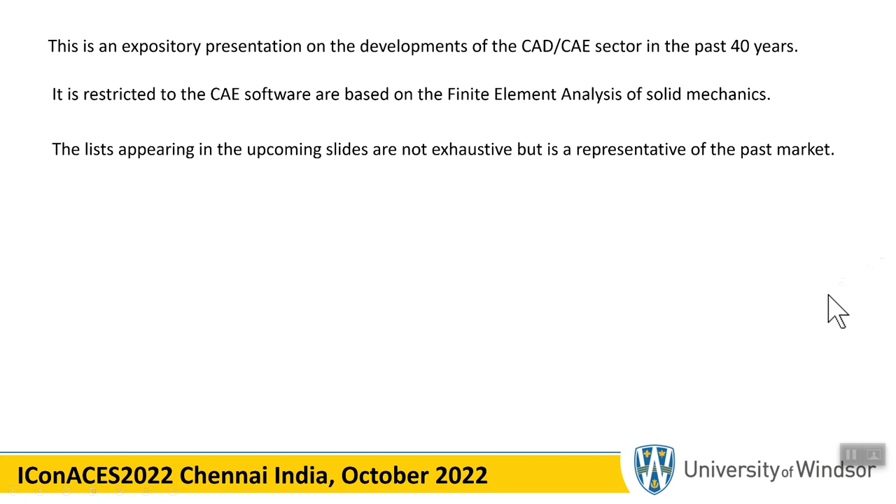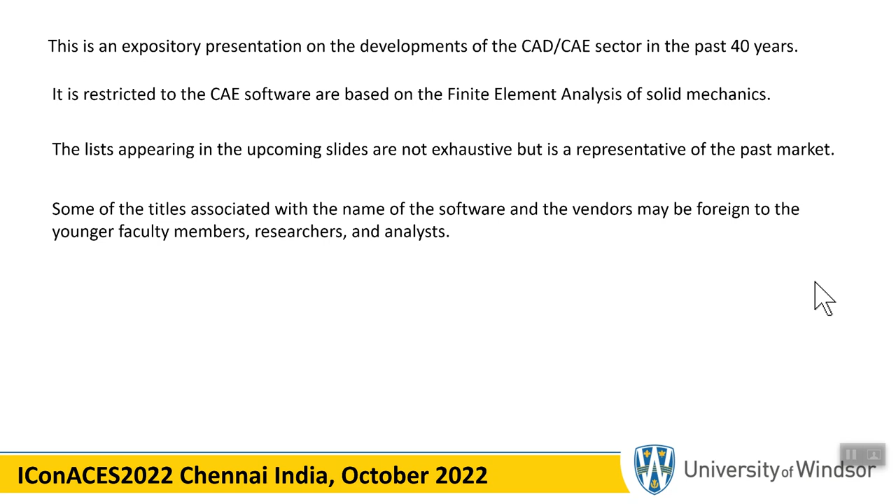The software that I'm going to be briefly bringing up on the screen later on are just a representative. There's a lot more that I may not have covered, but these are the primary software in the past 40 years. Certain names that I'm going to mention may be unfamiliar to some of the audience, partly because I consider myself an old timer, and some of these things go back to about 50 years ago.

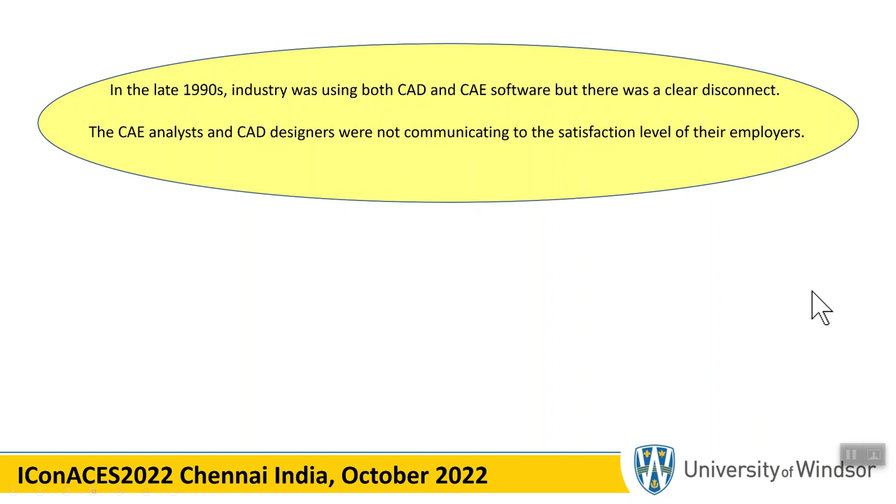Now, in the 1990s, the industries realized that there is a mismatch, a disconnect between the CAD software and the finite element software, or CAE software. So the CAE analysts could not clearly communicate their findings to the CAD designers and the other way around. This is why there was a move by the industry to push these vendors in a certain direction.

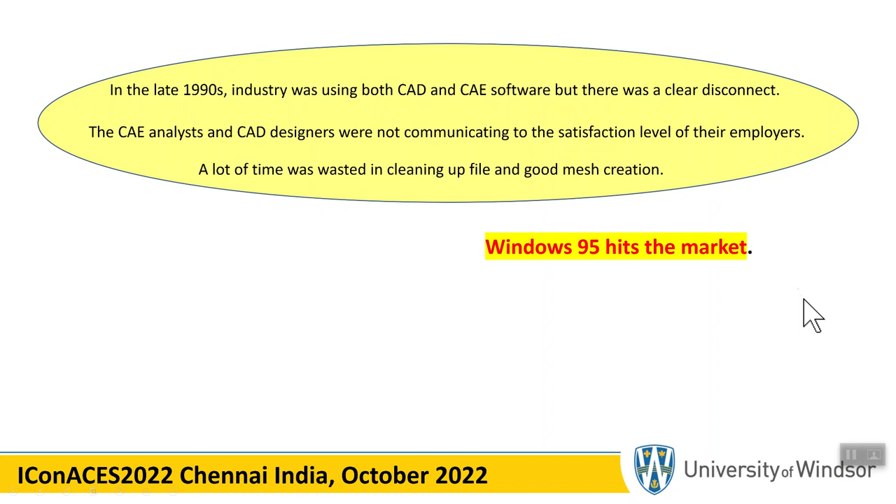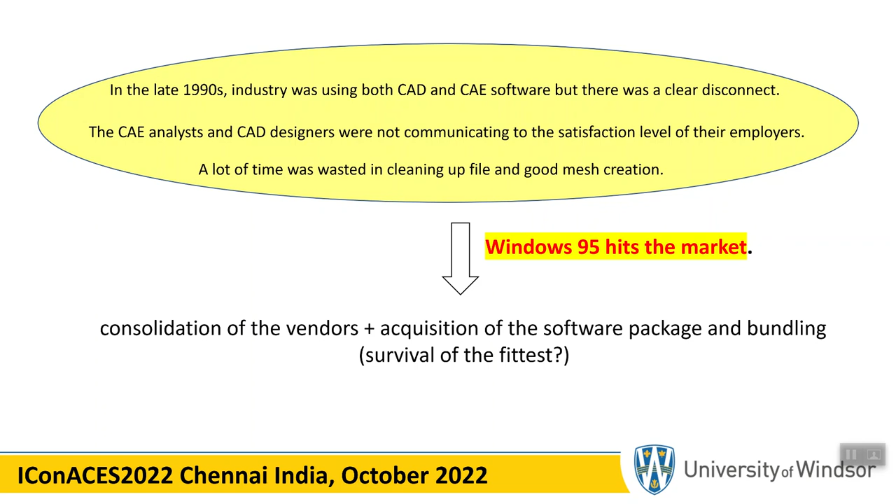Now, in 1995, you may recall that Windows 95 hit the market, and that dramatically changed the landscape. This is when the vendors started making a lot of acquisitions of software packages and bundling them with other things. Some of the software basically disappeared.

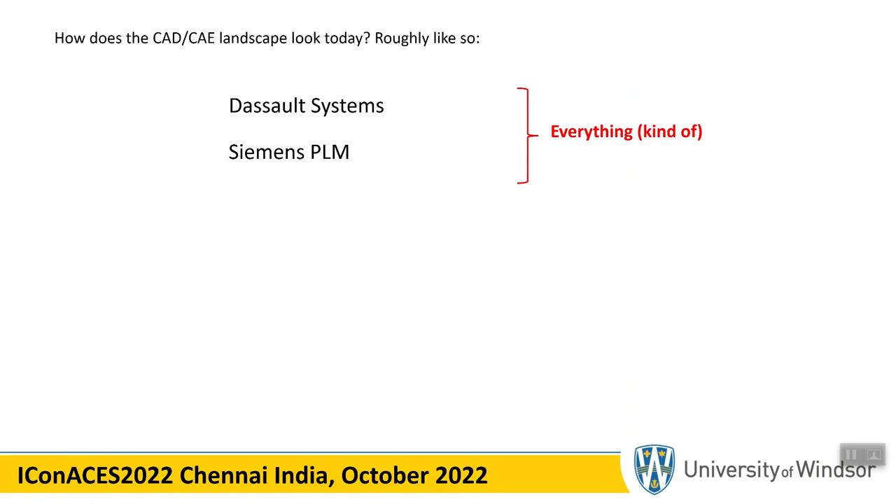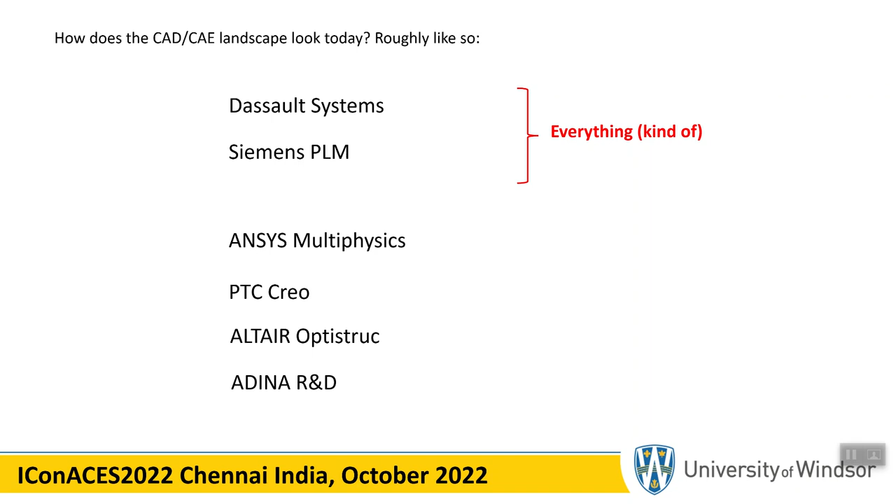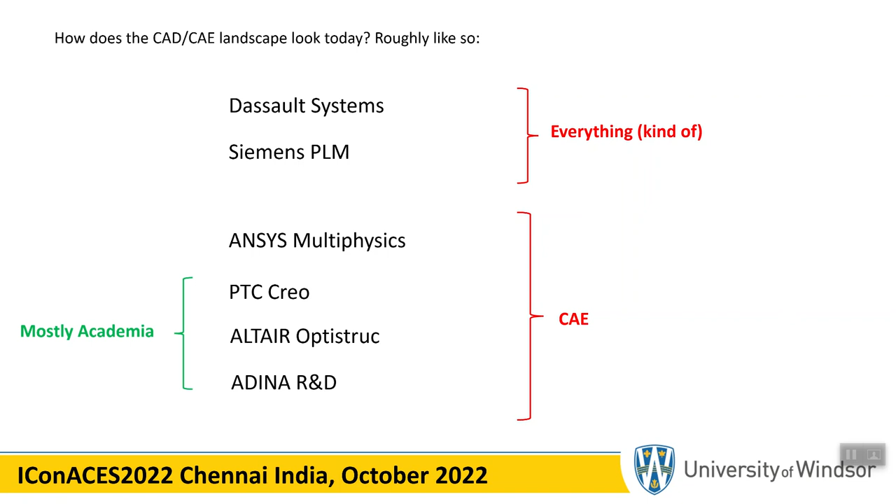Now, how does that crowded landscape look today? Well, there is mainly Dassault Systèmes and Siemens PLM, and these are trying to put everything that industry possibly wants and bundle it as a business platform. Then there are others such as ANSYS Multiphysics, PTC Creo, Altair, and ADINA, and these are mostly CAE packages, FEA packages, or fluids packages. I do not consider them as CAD platforms. These three are mostly used by academia, whereas the other ones are widely used in industry.

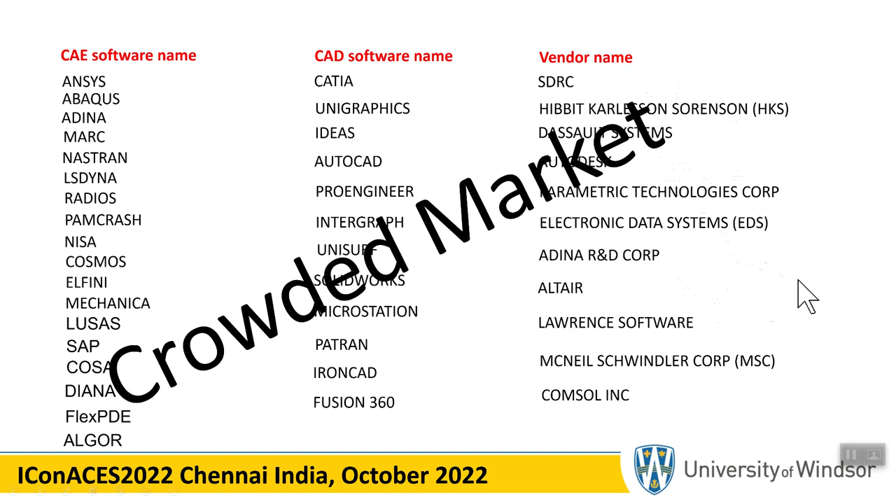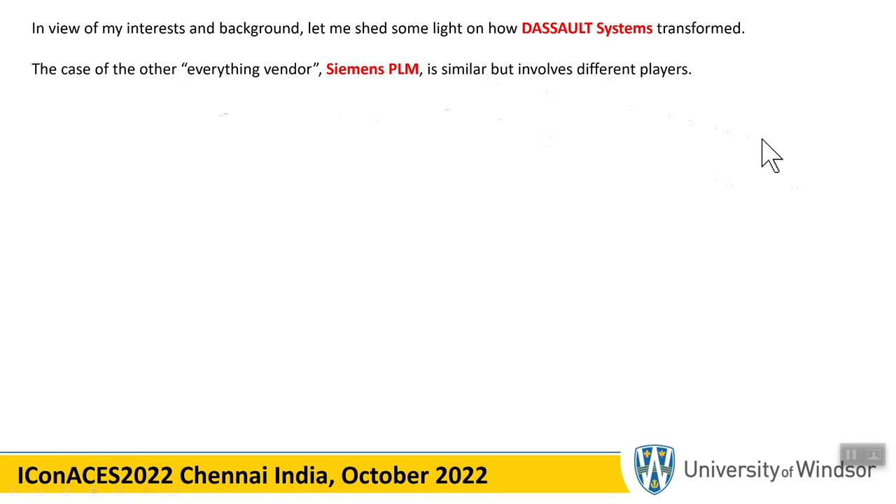Remember, this is what we had before, that crowded picture, which has been reduced to only two main players and three other CAE vendors. I'm going to be concentrating on Dassault Systèmes, mainly because of my interest in CATIA and 3DEXPERIENCE, which Dassault Systèmes owns. There is also Siemens PLM, and the story is similar, but I will not discuss it any further.

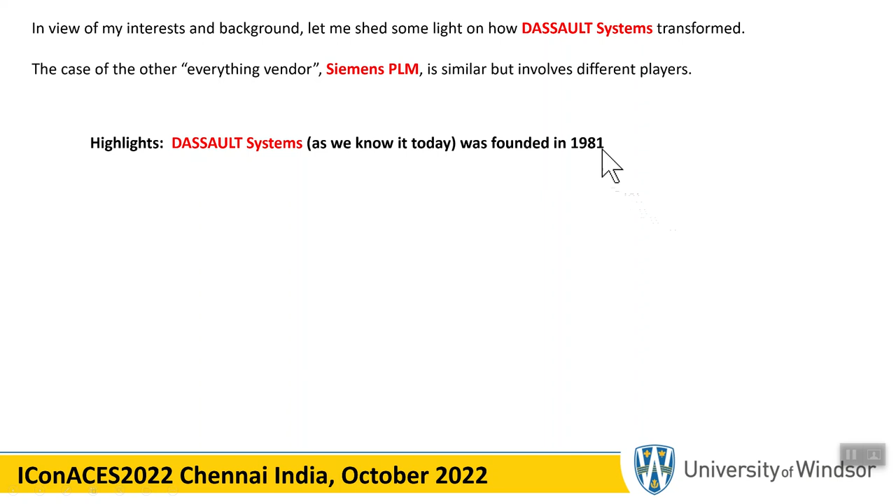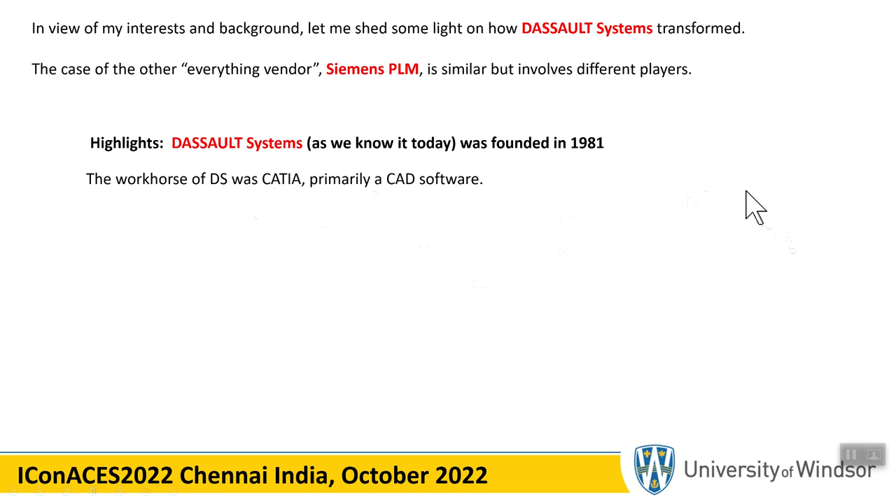Now, here's the highlight of the story behind Dassault Systèmes. It began in 1981, although prior to that it existed in the form of Marcel Dassault Aviation, which Dassault Systèmes later branched off. So it goes back to the 1970s as an aviation company. It was the main developer of CATIA, and the reason CATIA was widely used by the aerospace industry is because of its roots in Marcel Dassault Aviation.

Now, inside that CATIA program, somewhere around the 1990s, they put a stripped down version of a French code, which was called Elfini. Elfini stands for Élément Fini, meaning finite elements. At that time, IBM was teaming up with them on the software sales, marketing, etc.

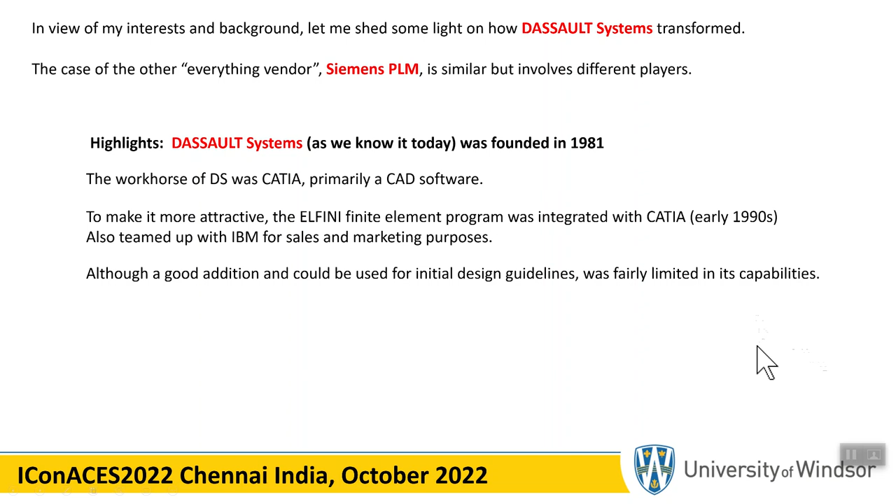CATIA was and is the state of the art industry standard for CAD activities, but the code Elfini buried in there is very limited in its capabilities. They included it because it was felt that the CAD analyst, the beginning or initial design engineer, should have some access to a basic FEA seamlessly integrated into CATIA.

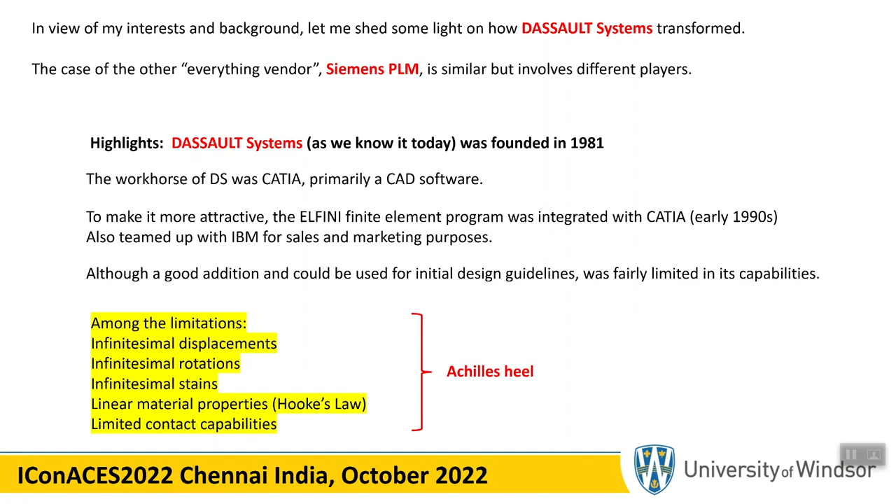The limitations of this Elfini program are infinitesimal displacement, infinitesimal rotation, infinitesimal strain, linear material properties, and very limited contact capabilities. That was actually an Achilles heel for the CAE capabilities of the CATIA program.

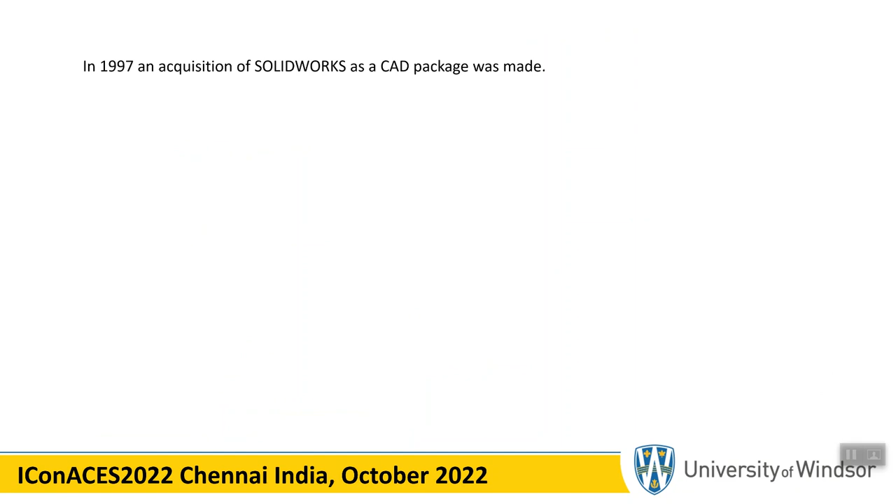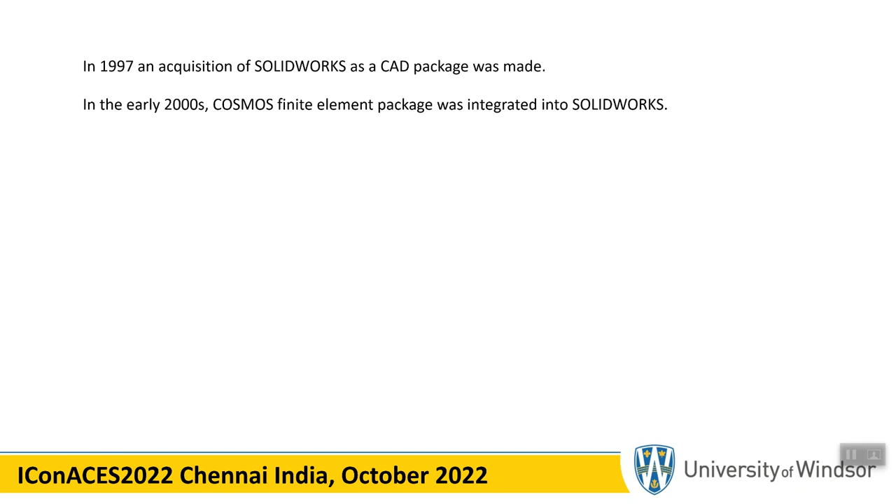Now, by the way, around 1997, SolidWorks, which was a separate company, was acquired by Dassault Systèmes, and later on the Cosmos program, which was also at that time a reasonably established computer program, was acquired and in fact buried inside SolidWorks. Just like Elfini was buried inside CATIA, CosmosWorks was buried inside SolidWorks.

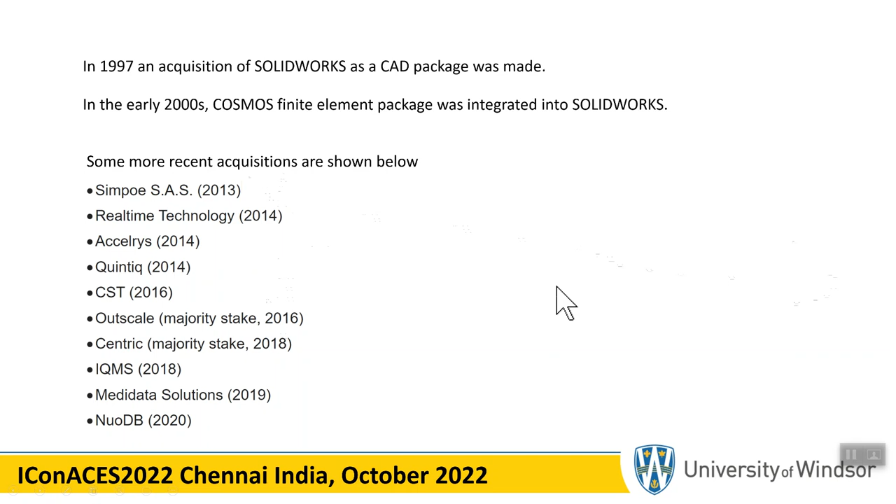Since 2013, they have made a lot more acquisitions. For example, Simpoe is an injection molding package, this one is a PLM package, and down here is a cloud-native distributed SQL database. Okay.

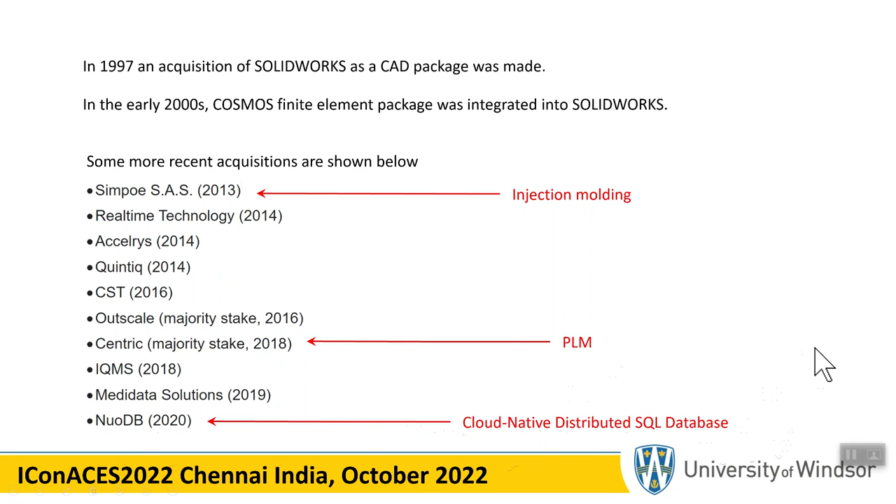Inside of the 3DEXPERIENCE, CATIA is the workhorse for CAD capabilities. And the FEA package, Elfini, was replaced with HKS's Abaqus program, which was acquired in 2005. No more limitation. So if you look at one of the main screens of the 3DEXPERIENCE, you see SolidWorks there, CATIA there, and there's SIMULIA, which basically has all the FEA stuff in it.

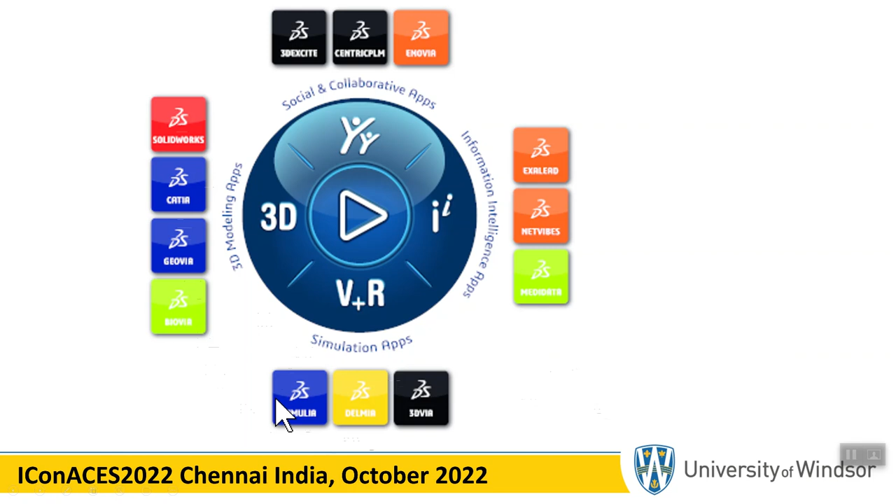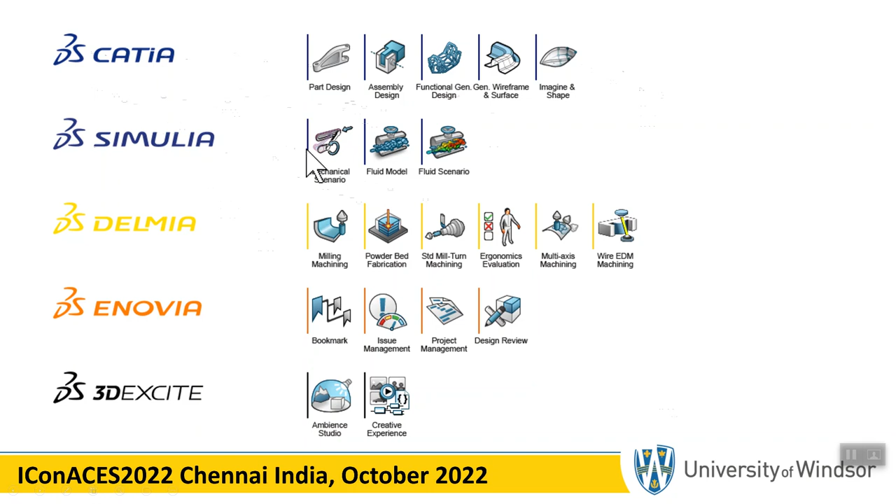For example, those of you who have used CATIA will see that the icons have changed and the interface has changed. However, the essentials are there: part design, assembly design, generative shape design, etc. Or if you look at SIMULIA, you can see these things; some of these are fluids related, but this is the one that has the Abaqus program in it. Okay, so CATIA is still the CAD tool within the 3DEXPERIENCE.

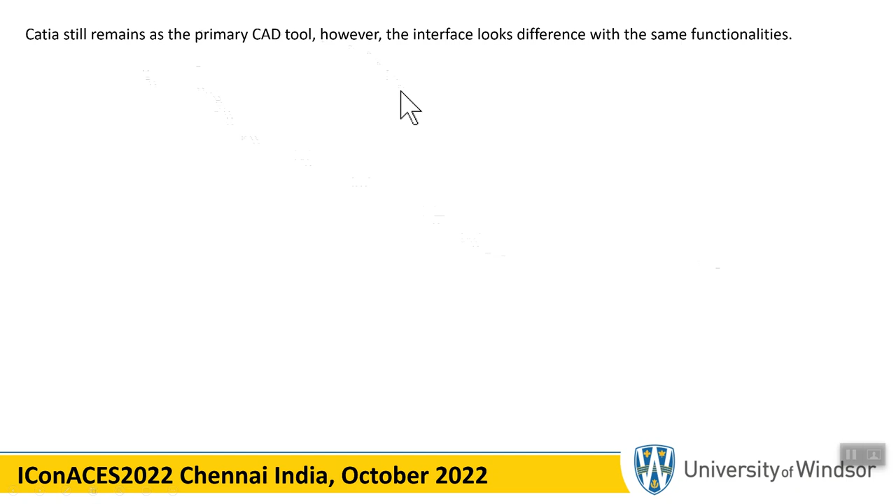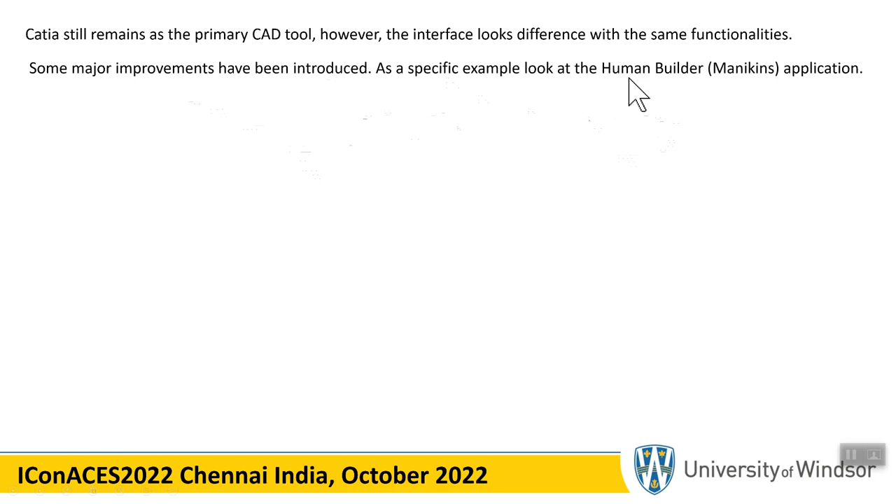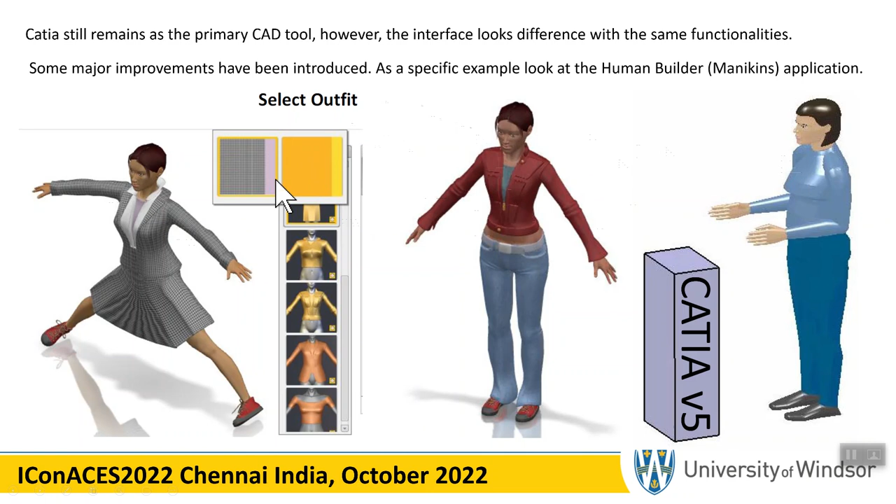There have been major improvements in certain aspects. For example, within CATIA there used to be a mannequin workbench or Human Builder, and typically if you brought a mannequin inside CATIA V5, it looked like this. Now in 3DEXPERIENCE, they have acquired other strong features so that you have a great deal of flexibility. If you compare this with that, you can see there's a great deal of improvement. You can go all the way down to the facial features of the mannequin.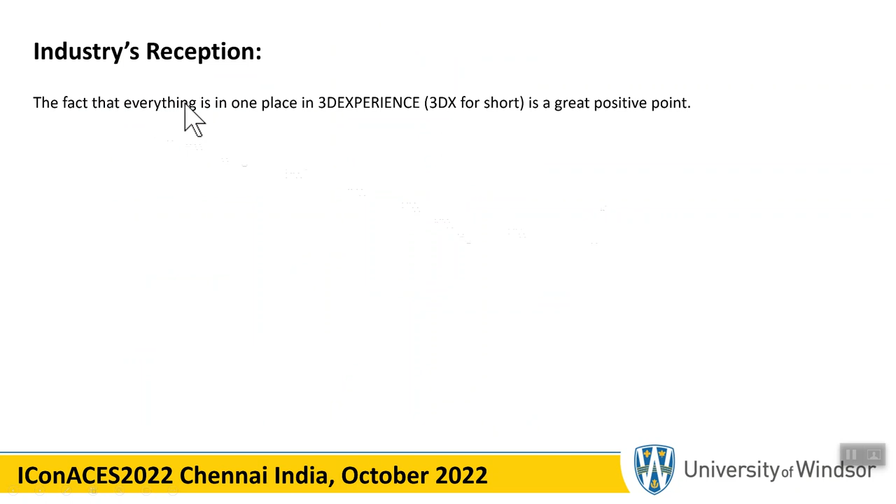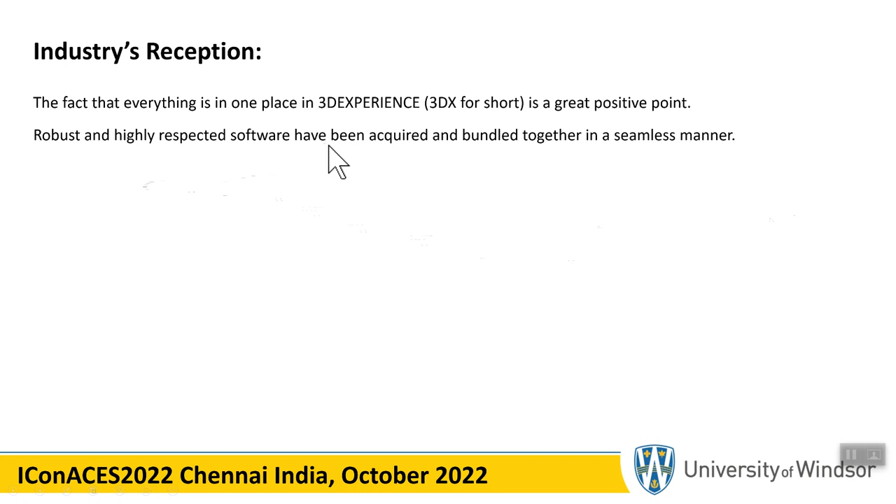And industry's reception of these improvements is that, well, it's great. Everything is seamlessly in the same program. Robust, highly respected software individually, CATIA, HKS or Abaqus, etc., integrated into a seamless bundle. A lot of companies are using it. The installation can be on-site or on the cloud because of confidentiality, and industry is very keen about that. And there is excellent training, for free or by partners, in the public domain.

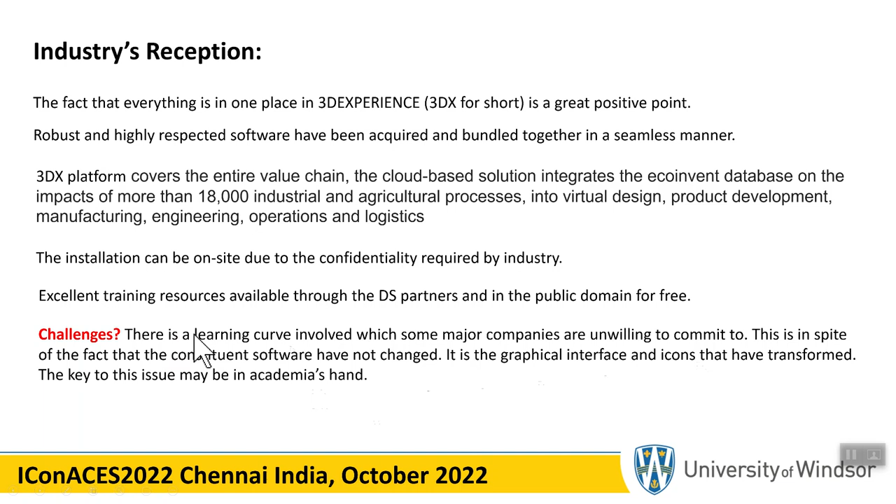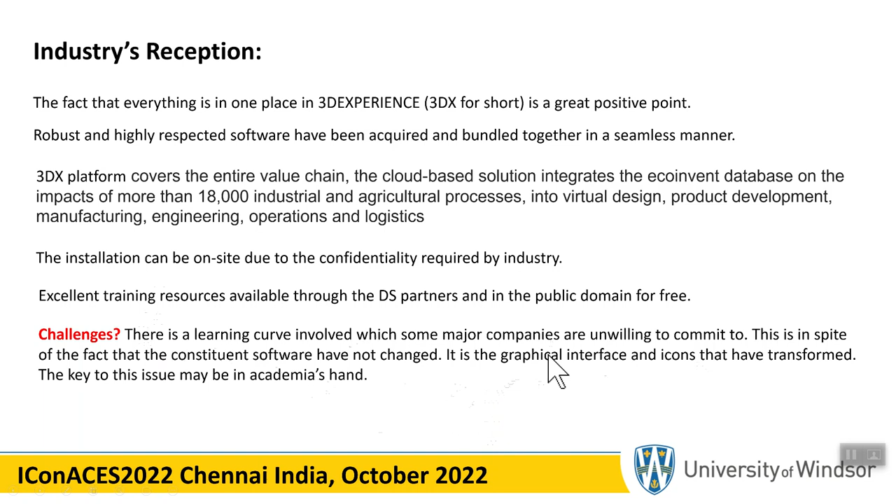But there are some issues. There is a learning curve. Somebody who knows CATIA or Abaqus cannot just acquire all the skills needed to do it on 3DEXPERIENCE immediately. There is a learning curve, and companies are in many cases unwilling to commit to it.

As far as academia is concerned, everything in one place is a great positive. It's on the cloud, so you don't have to worry about administration. The collaborative aspects are great: student projects, colleagues collaborating with each other, and a lot of information is available in the public domain. Adding Abaqus to 3DX was a great improvement.

As for challenges, you need a good internet connection, and there are very frequent changes in the interface to include all the aspects of the CATIA program and the Abaqus program within the 3DEXPERIENCE. And unfortunately for laptop users, there are also some graphics card limitations that have to be addressed.

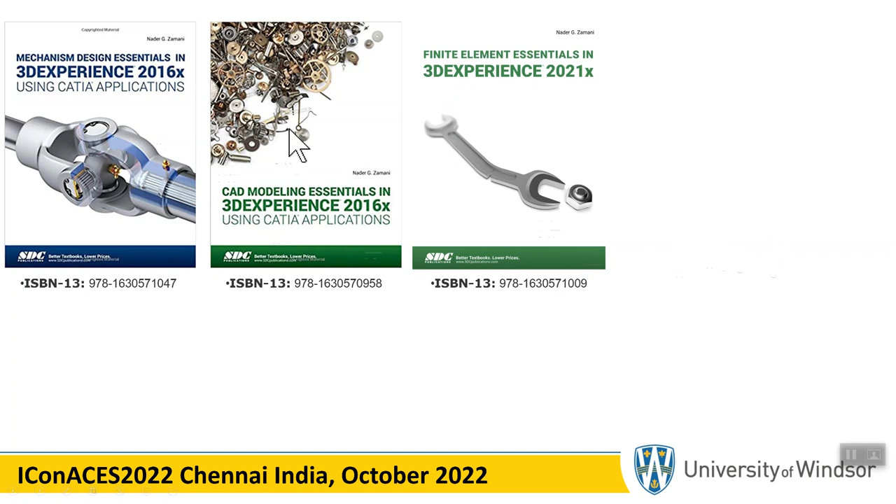Now, I was asked by Dassault to be one of the members of the steering committee on simulation, realizing that there was very little information at that time. I'm going to show you some of the educational things that are available now. I did these three books, one on general CAD modeling, another on mechanism design, and the finite element one. And I also prepared some material for online distribution.

So that's pretty much it. I hope that some of you found this presentation useful, those who may not have had the opportunity to look into the 3DEXPERIENCE or work with the CATIA program, and how there's a reincarnation of them in the 3DEXPERIENCE business platform.